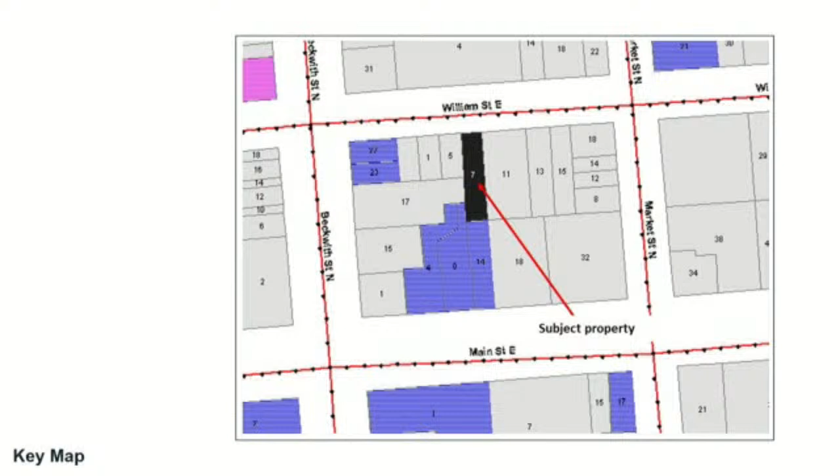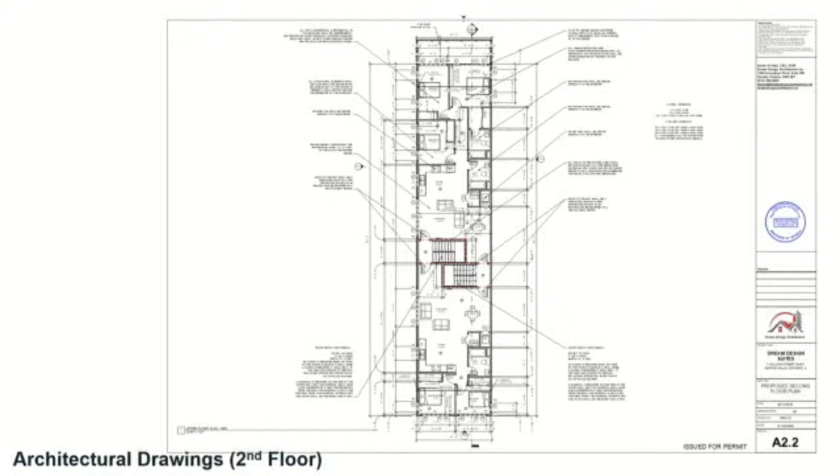For the elevations, they are using horizontal Dutch lap vinyl, so basically it's typical vinyl siding. On the front they're using some exterior stone as well as stucco on the second floor.

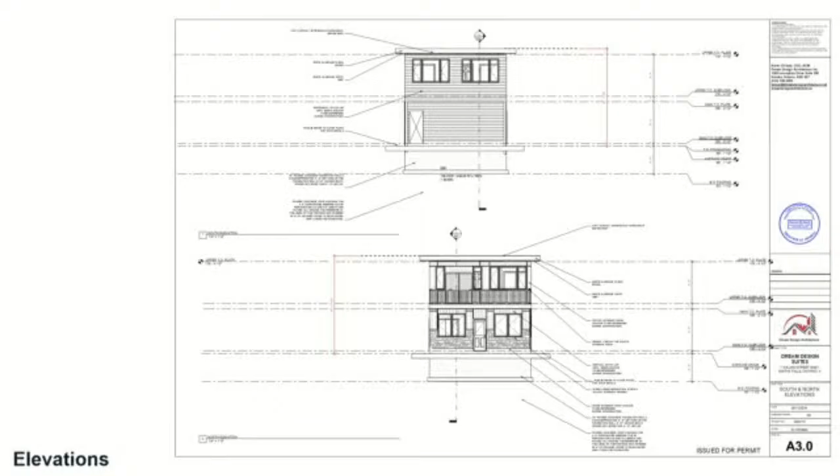These elevations just show you the front end where they propose balconies in the front, from different angles. Then we have the rear view that shows the second floor, as well as the cantilevered post for where the parking area will be located.

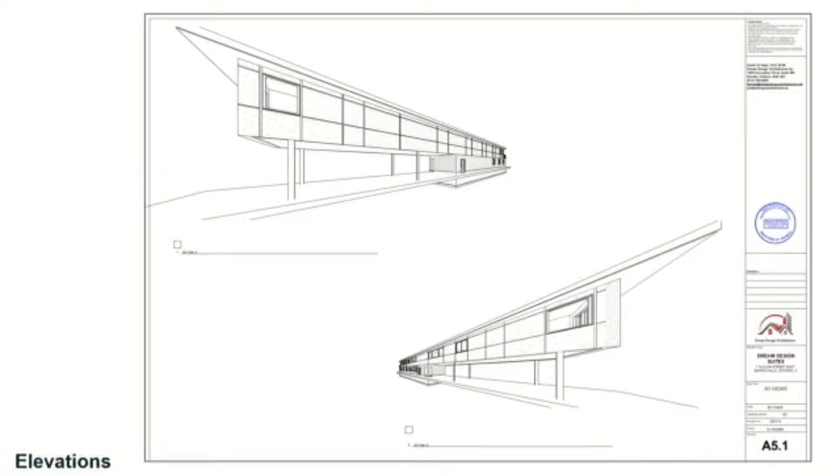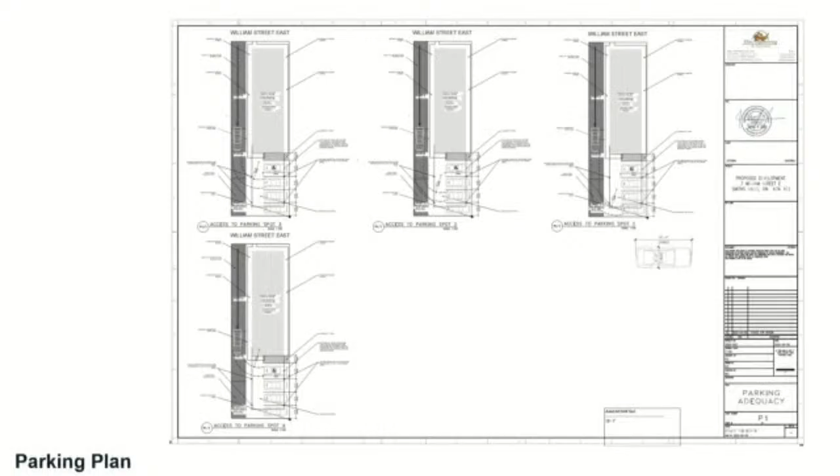New information: that's just an example of what typical vinyl siding looks like for Dutch lap vinyl, just in case people were having a hard time visualizing the proposed vinyl that would be on the side of the building.

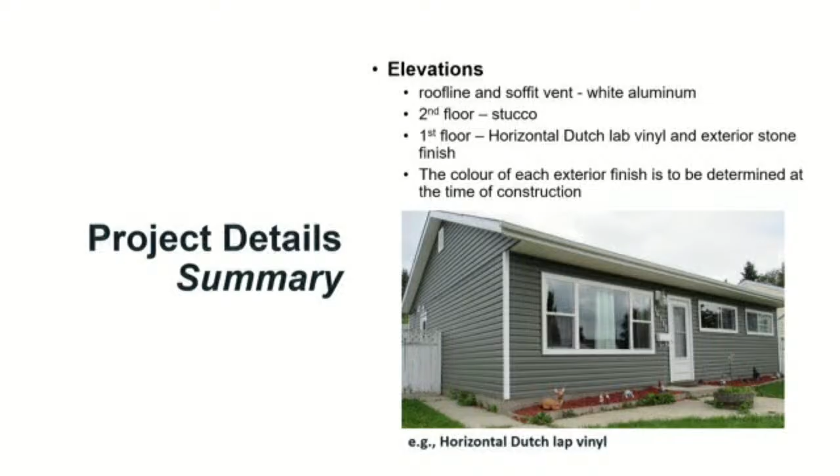For servicing, there will be water and wastewater connections off of William Street, and stormwater management will be addressed using roof drains and an inflow control device. They'll be receiving typical pickup for residential and the commercial units.

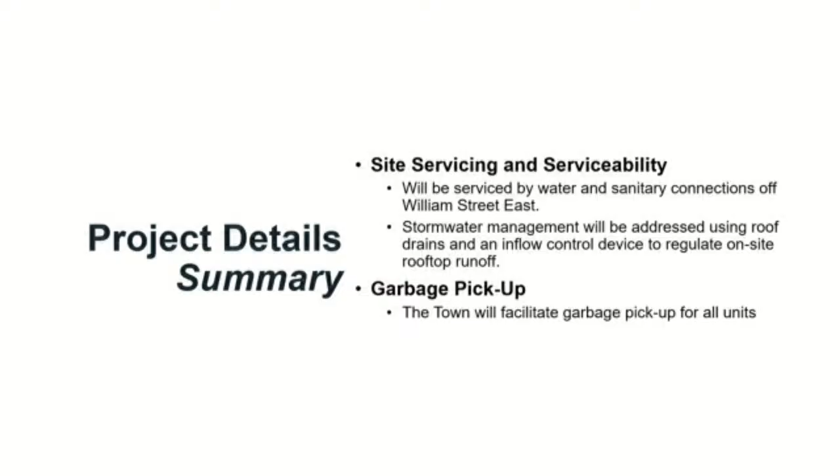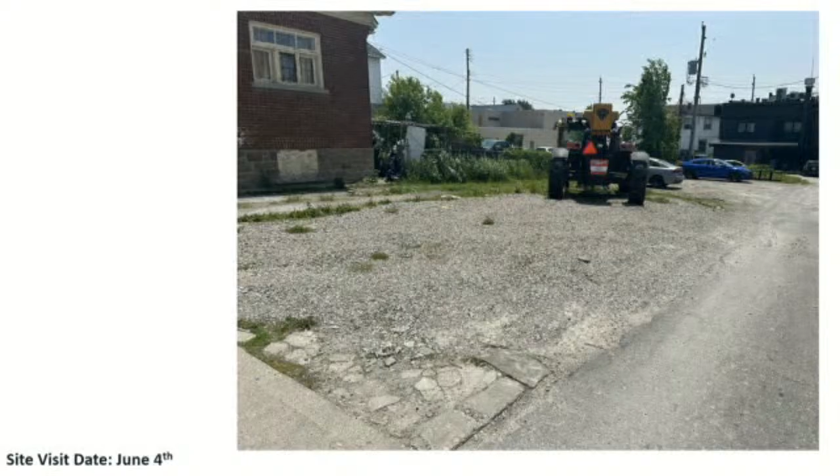In terms of comments, we received no objections from Enbridge, the building department, or fire department, and we have had no feedback from Bell Canada or Hydro One.

We've only received feedback from Public Works, and they have largely no objections until we look at the parking site design. That's the only issue they have had concerns with, and they've provided their comments to the applicant, which can be seen in the appendix of the report, Appendix E I believe.

In terms of parking access, the parking stalls will be accessed with a 6.7 meter driving aisle. As discussed before, additional follow-up was requested for the parking plan.

As discussed before, we're looking at exterior finishes of stucco, stone, and vinyl siding. The downtown core guidelines do not encourage the use of these materials, stucco and vinyl siding, because they're considered low quality materials. We would recommend that the applicant look at brick, stone, board and batten, or cement board—essentially higher quality materials for siding.

In terms of lighting, the proposal did not articulate any exterior lighting, so we asked that the applicants provide that in revised architectural drawings, and the exterior lighting features must be dark sky compliant, meaning they're downward turned, reducing light spill.